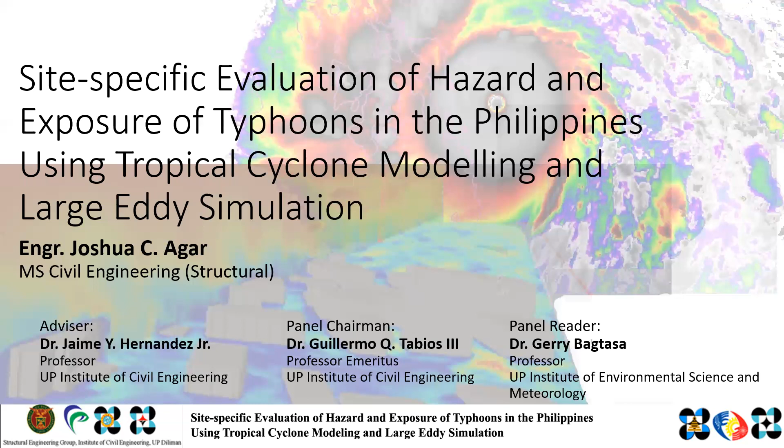I am Joshua C. Agar, an MS Civil Engineering student from the Institute of Civil Engineering with a graduate research entitled Site-Specific Evaluation of Hazard and Exposure of Typhoons in the Philippines using Tropical Cyclone Modeling and Large Eddy Simulation, with Dr. Jaime Hernandez as my thesis advisor. The outline of my presentation will involve the background, the objectives, the definitions of the parameters involved, the methodology, the summary, conclusions, and recommendations.

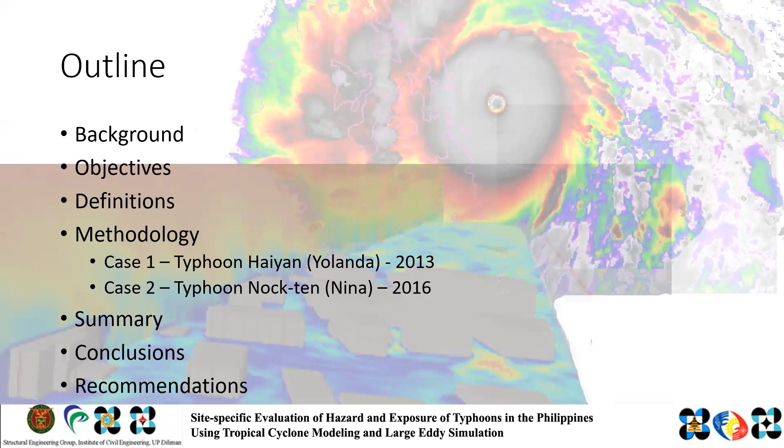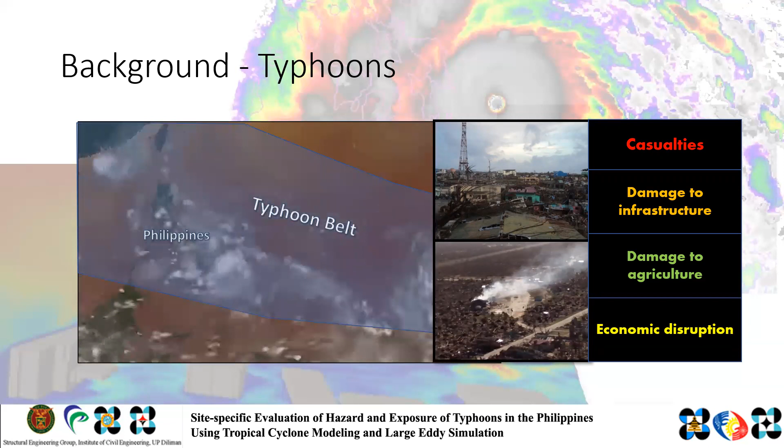The study centers upon typhoons, which frequent the Philippines, an archipelagic nation situated along the typhoon belt, which in turn is exposed to the hazards that typhoons bring, particularly severe winds, on which this thesis is focused. Severe winds amount to risks such as casualties, damage to infrastructure, damage to agriculture, and disruption of the economy. To address the said risk on the engineering side, engineers implement sturdier designs against winds, which are detailed in the wind code provisions of the National Structural Code of the Philippines, currently at its 2015 edition.

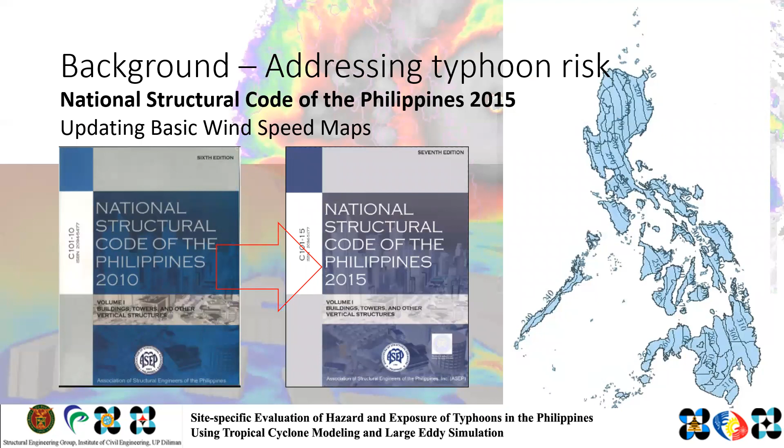One of its major updates compared to the 2010 edition was the updated basic wind speed map, shown on the right. According to the description of the current basic wind speed map, the wind speeds were derived from the generalized extreme value analysis of the wind speeds recorded across synoptic stations of PAGASA all over the Philippines, with a 3% probability of exceedance in 50 years.

Also, using GEV analysis on the station data alone is only applicable for winds of non-cyclonic nature. For example, only the stations in Malaybalay, Butuan, Davao, and Cagayan de Oro exhibit those kinds of winds. I come from Malaybalay, Joshua. Yes po. Okay.

The basis of the wind speed maps, along with the rest of the updated code provisions, were carried over from the ASCE wind code provisions, which center on the wind pressures rather than the winds themselves. In comparison, in other wind codes in countries such as Australia and Japan, the local winds were first determined before evaluating the wind pressures themselves, taking more into consideration what's called wind exposure.

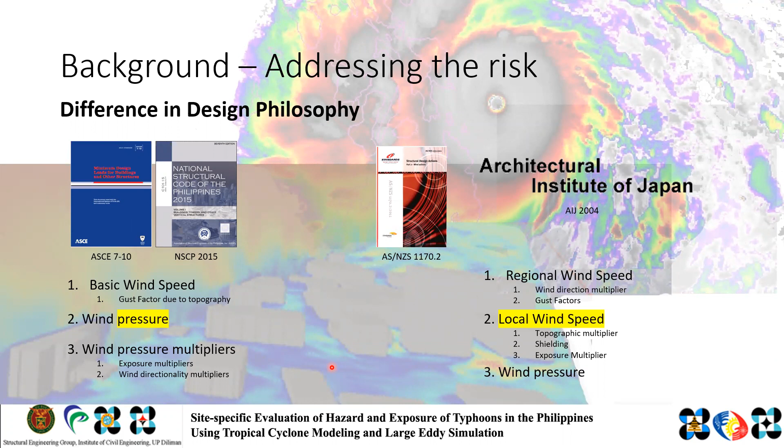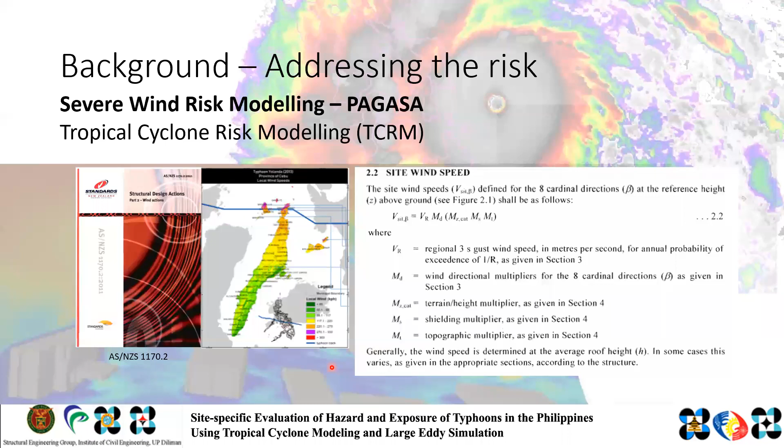With the methodology adopted from their Australian counterparts, PAGASA in its severe wind hazard and risk program aims to evaluate the cyclonic winds through a regional wind probability analysis, while also adapting the parameters for wind exposure from the Australian wind code, which does not translate to the wind exposure here in the Philippines. The typhoon simulation which PAGASA is doing, on the other hand, comes a long way, starting with the determination of the pressure field, which can be translated into the gradient wind by balancing the pressure gradient, Coriolis force, and centrifugal force.

The translation of the storm shown in 5 is now also being considered, so there's an additional component here in determining the gradient wind. However, even so, as Holland found out, the gradient wind does not equate entirely into the surface wind. Attempts have been made by researchers such as Georgiou in 1983 and Fuiji and Mitsuta in 1986 to convert the gradient wind into the surface wind.

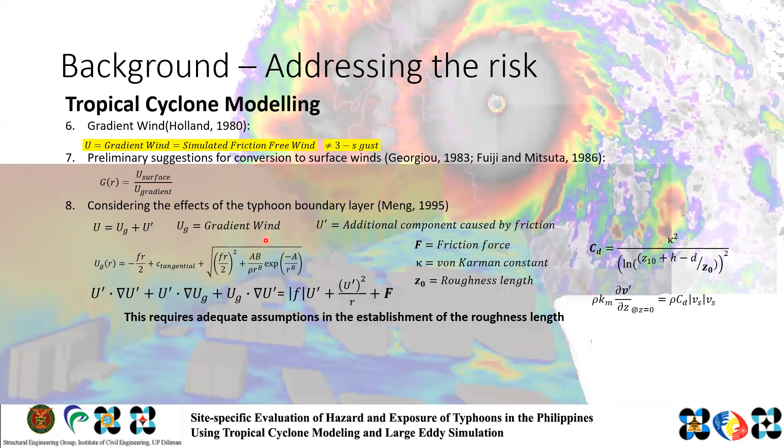The assumptions of the boundary layer no longer apply for complex terrain and urban settings. To circumvent the conventions regarding how a wind flows over a domain, a hybrid model was introduced where the magnitude of the friction-free surface wind was determined using the gradient wind equation, while its dissipation over the complex terrain was simulated using computational fluid dynamics, yielding results even closer to the field measurements.

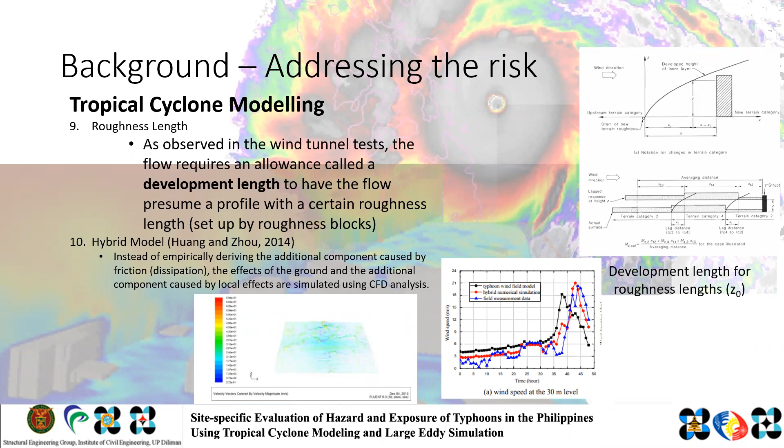What complicates every CFD analysis, however, is modeling turbulence. There are two turbulence models at hand. First is the Reynolds-averaged Navier-Stokes equation, or RANS, which treats the turbulent effects as additional average effects, and large eddy simulation, which treats turbulent flow as a superimposition of eddies of different sizes. So the comparison is shown on the top left. At top right is a flow simulation using RANS. On the bottom right is the flow simulation using LES.

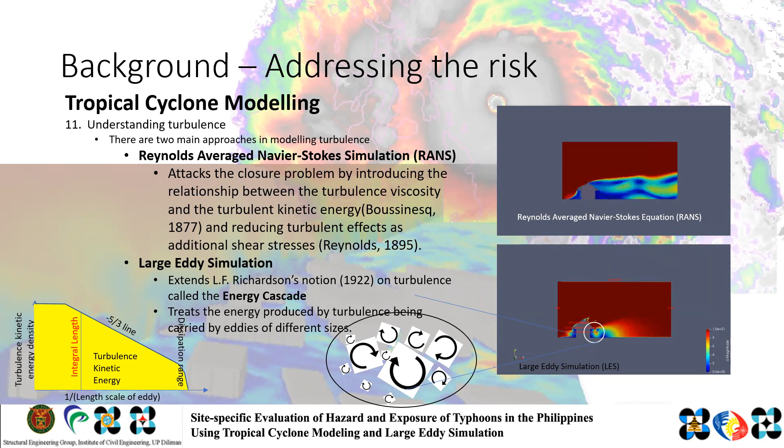The large eddy simulation originated from the energy cascade theory proposed by Richardson in 1922. This means higher turbulent kinetic energy will mean a higher range of eddies whose superimposition could lead to higher peak gusts. The previous hybrid model, the one done by Huang and Zhou in 2014, uses RANS in modeling turbulence, which only accounts for the average effects. Of course, the study focused more on evaluating the wind pressures. This study, however, proposes using the hybrid model with large eddy simulation instead.

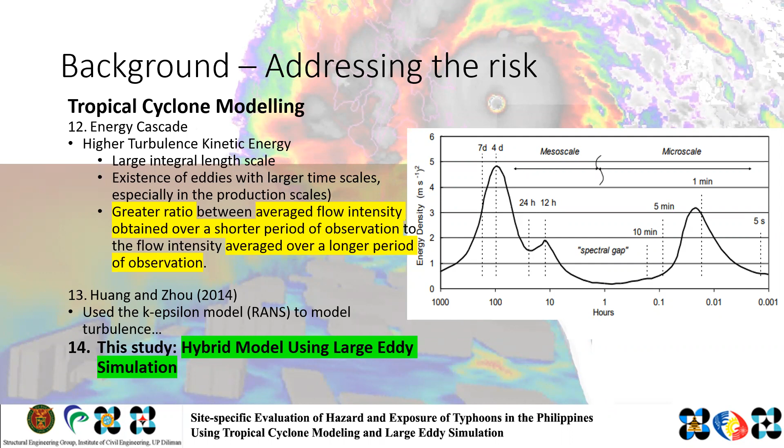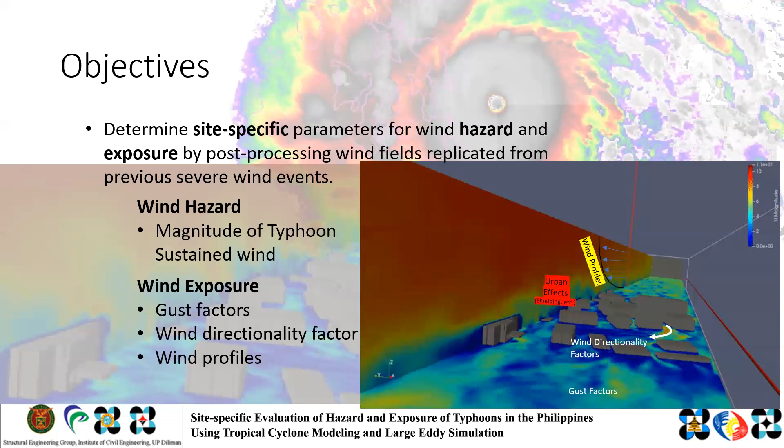So for this study, the objectives were to determine the site-specific parameters for wind hazard and exposure by post-processing the wind fields replicated from previous severe wind events. For the wind hazard, there's the magnitude of typhoon sustained wind. For the wind exposure, this includes gust factors, wind directionality factors, and wind profile. To define each one, we start with the gust factors. These are conversion factors used to determine the 3-second gust from the sustained wind given a degree of wind exposure. For types of exposure, for example, inland, off land, off sea, and at sea, there is a set of gust factors to be implemented. These were the guidelines from the World Meteorological Organization compiled by Harper, Kepert, and Ginger in 2010.

The wind directionality, on the other hand, in contrast to the NSCP definitions, determines which direction the location was most exposed to the severe wind. So, for example, if the location experiences higher winds coming from the northeast, then you assign a higher wind directionality factor or wind direction factor at that sector. The roughness length determines the horizontal mean profile near the ground. The horizontal mean profile was assumed to be logarithmic in nature, and it's mainly controlled by the roughness length.

So we proceed now with the discussion of the methodology. The methodology relies on the weather stations and the typhoon track. These are the data coming from the weather stations, and this is the data coming from the storm track in order to determine the pressure field of the typhoon. So it eventually converges and leads to the pressure field modeling.

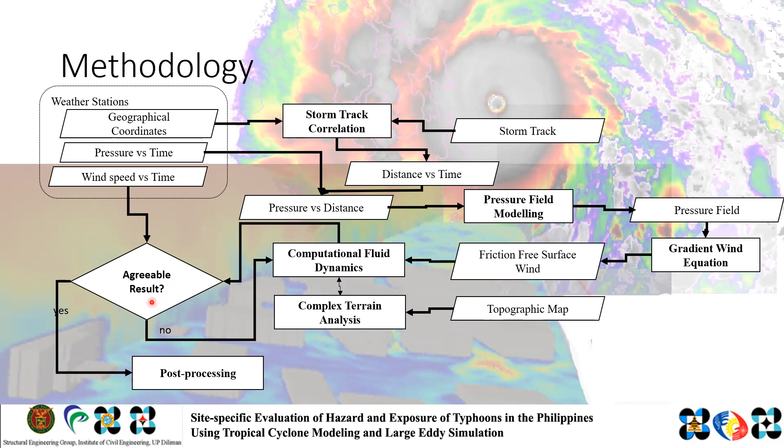Using the pressure field, the typhoon wind field is then simulated, which is then used as the input. So this is the result of the typhoon wind field modeling. This will be used as an input to the analysis involving computational fluid dynamics, which also involves a complex terrain. So once the simulated winds were validated with respect to the actual data, the site-specific factors for exposure can now be post-processed.

The methodology includes modeling the pressure field from the weather stations observing the passage of the typhoon. The time history of the pressure data was then related to the proximity of the storm in order to determine the pressure versus distance graph. The pressure points were then fitted into a rectangular hyperbolic profile proposed by Schloemer in 1957. However, the main difference is that the pressure isobars, instead of being considered as concentric circles, will be considered as ellipses. So the radii of curvature will also be determined in this procedure.

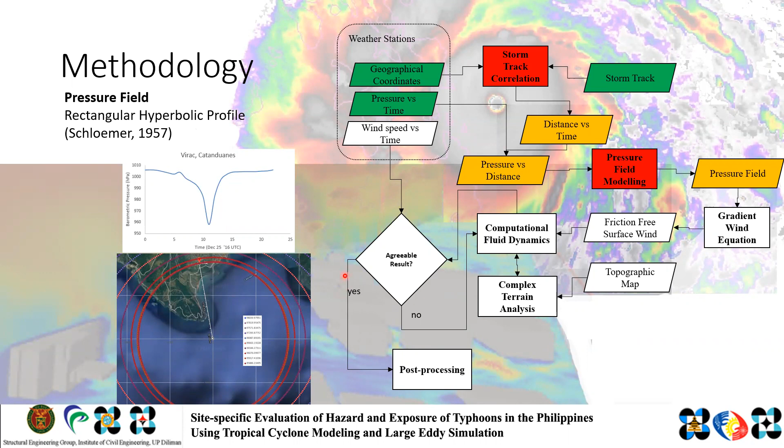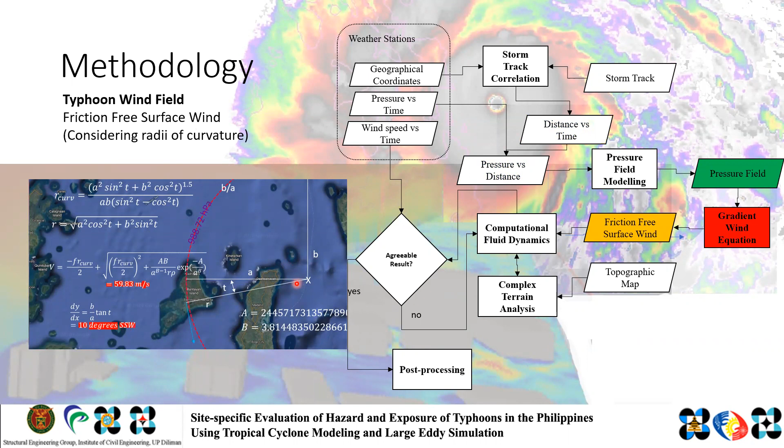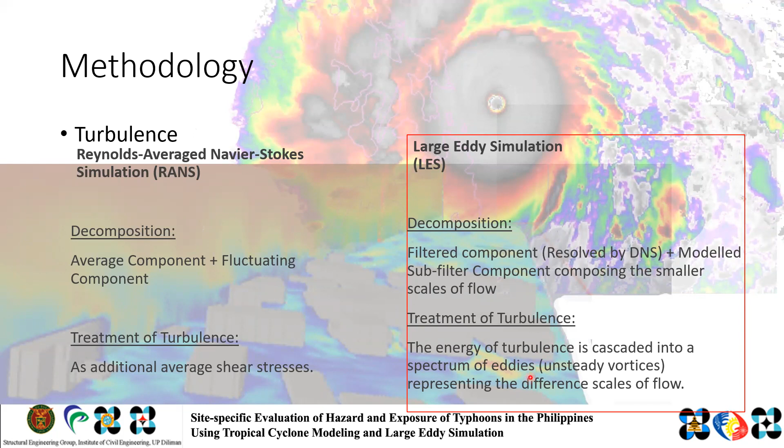Using the radii of curvature, the pressure gradient, the Coriolis force, and the centrifugal force, the typhoon wind field will then be determined, which will be used as the input in the CFD analysis as mentioned earlier. For the CFD analysis, instead of RANS, we will be using LES, which treats turbulence as a superimposition of eddies of different sizes. A complex terrain is generated using the elevation data from OpenStreetMap. To reduce the computational load, the buildings are reduced to mostly rectangular blocks, but still carrying the key dimensions such as length, width, and height.

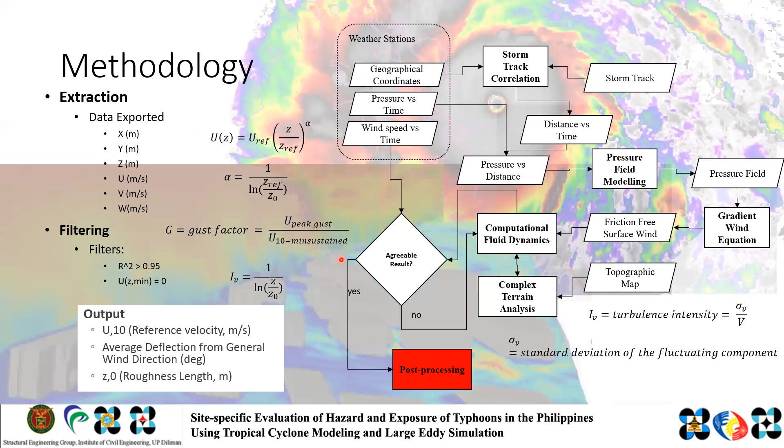Gust factors, on the other hand, are determined by comparing the magnitude of the friction-free surface wind to the local winds. You divide the magnitude of the local winds by the magnitude of the friction-free surface wind. Then you evaluate the gust factors. And finally, we also evaluate the directional deviations of the local winds. And to add to that, we also determine turbulence intensities.

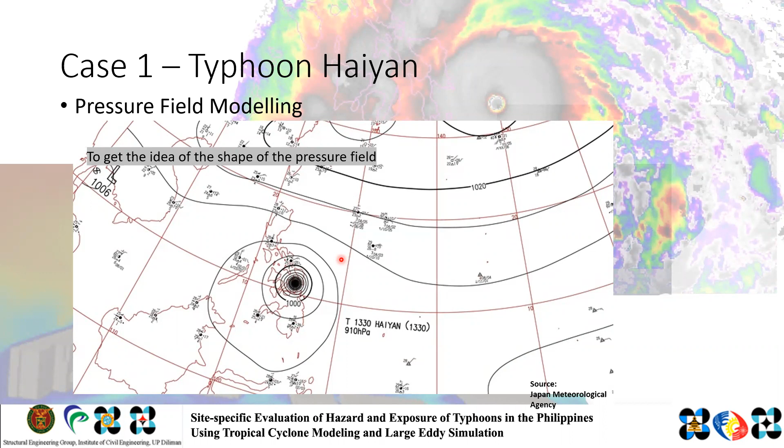The methodology was implemented on 2 cases. The first one is Typhoon Haiyan in 2013. To determine the shape of the pressure isobars, the surface weather maps from the Japan Meteorological Agency were used. So this was their pressure map determined at 8 a.m., after Leyte landfall. The pressure isobars were then fine-tuned using pressure readings from the automated weather stations of the Advanced Science and Technology Institute, or ASTI, highlighted in blue, these 3, as the synoptic stations of PAGASA, particularly in Tacloban and Guiuan, highlighted in yellow markers, suffered extensive damage during the passage of Typhoon Haiyan.

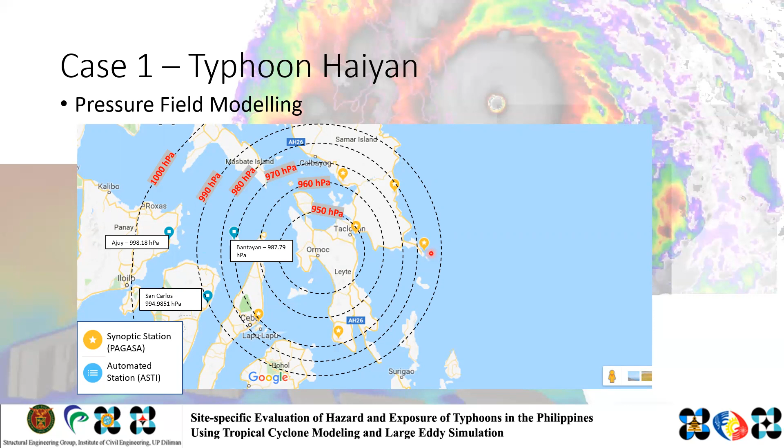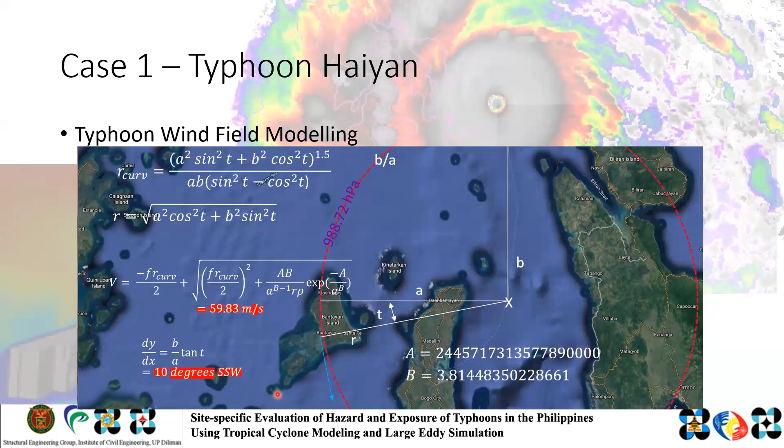Knowing the pressure field and the shape of the ellipses, the friction-free surface wind was determined using the gradient wind equation. So this is the whole equation that I used in determining the gradient wind. In this case, it was 59.83 meters per second, coming from the direction of 10 degrees south-southwest. 59.83 meters per second then becomes the inlet velocity for the CFD analysis. The simulated winds were then related to the actual reading of the automated weather station of ASTI, which is marked as X in the figure, where a peak 2-second gust of 64.1 meters per second was observed.

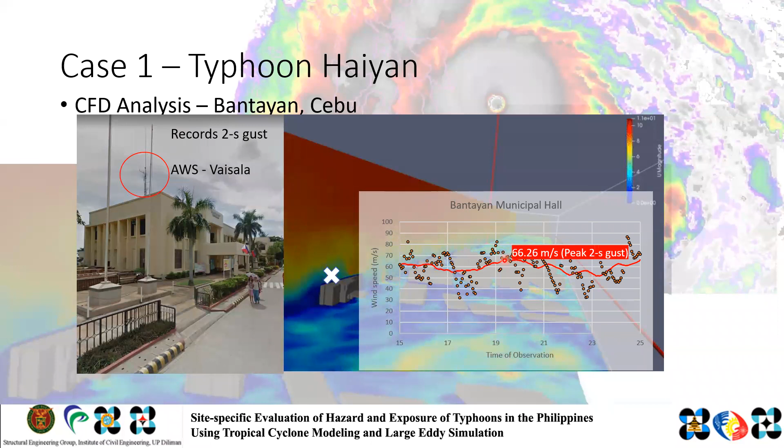The simulated winds were originally instantaneous, so to get the 2-second peak gust, we have to average the winds over a time period of 2 seconds. Getting the 2-second averages yields a peak 2-second gust of 66.26 meters per second, with a difference of 2.16 meters per second from the actual data. Being close enough, the other points in the computational domain were then post-processed. The post-processing involves 5 sections.

4 sections were streets in Bantayan, namely Quezon Street, Rodriguez Street, Osmeña Street, and Ybañez Street. The last section is the central section, bisecting the computational domain, passing through buildings. Among the post-processed data were gust factors, roughness lengths, and directional deviations of the local winds. Also displayed in the subsequent figures that I'll be showing are black lines which indicate the surface elevation. In this section, as with the second case, the treatment of the graph is that the flow always moves from right to left. So we start with Quezon Street and we evaluate the roughness length.

Evaluating the roughness length reveals its relationship with regards to the building density. So in this case, this is the region where higher building density was observed. The higher the building density, the higher the roughness lengths observed, ranging from 0.1 to 3.5. When there's lower building density, you would observe lower roughness lengths.

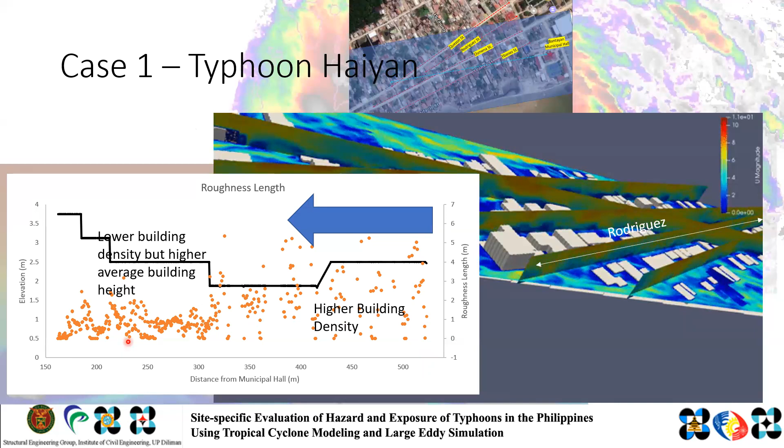The same behavior of roughness length can be observed in Rodriguez Street, with the roughness length being higher at regions of higher building density, now ranging up to 5 meters compared to the peak of 3.5 meters at Quezon Street. So same behavior: lower building density, lower roughness length.

For the most exposed street, Ybañez Street, when compared to the other streets, the street exhibited more erratic directional deviations. So the local winds veered left and right along the street. You can see, for example, this is 0, the wind veers from left and veers from right, and so on and so forth.

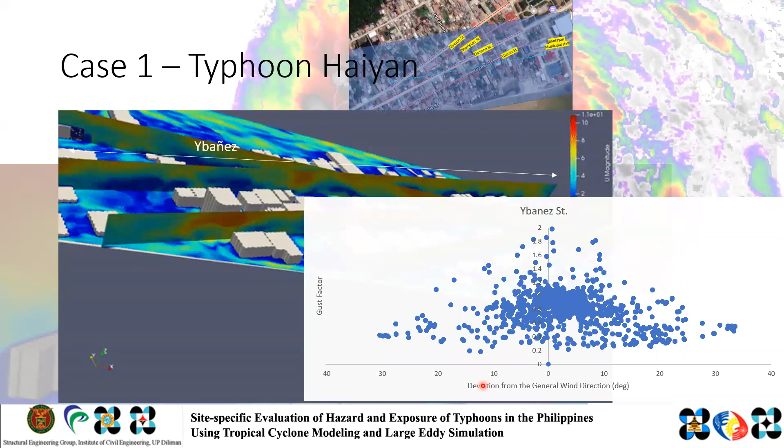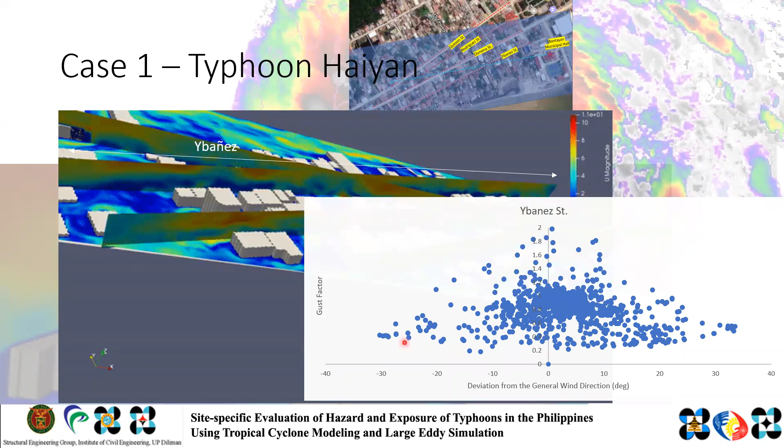Plotting the directional deviation with respect to the gust factors reflected the fact that as local winds became aligned to the direction of the general wind, the more likely they are to build up momentum, resulting in higher peak gusts. So if the local winds deviate more from the general wind direction, you would expect lower peak gusts to be observed.

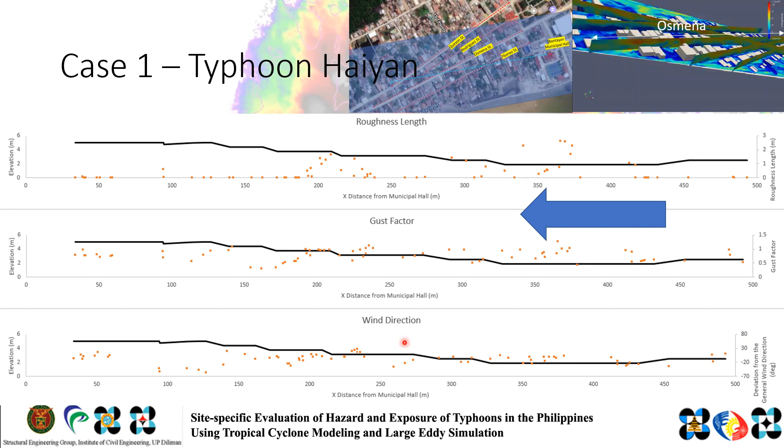On the other hand, on Osmeña Street, out of the 15,700 points post-processed, only 500 points made it past the filtering process. This indicates that most of the wind flow moving through the street lost its logarithmic profile. This has to do with the assumption in the boundary layer profile where only the ground is bringing shear stresses to the flow.

In cases such as Osmeña Street, where most of the mid-rise buildings are situated, the shear stresses also originate from the buildings themselves, causing a disruption of the vertical wind profile. This also caused downdrafts, which damaged the already deteriorating Escario house at the end of Osmeña Street. The Escario house is marked as X in the figure.

Finally, the central section will cover how the exposure parameter changes when there are buildings involved. So we highlight this section. It reveals how, as the wind flow changes elevation, for example from sea level to a certain elevation after encountering the beach, initial amplification occurs where the wind picks up momentum. Then naturally, the wind flow separates, causing a decrease in the gust factor.

So this, for example, is the beach. Then you observe an initial amplification. Then as flow separates, you observe a decrease in the gust factors. Then as the wind flow reattaches to the ground, momentum picks up again, resulting in higher peak gusts, shown here.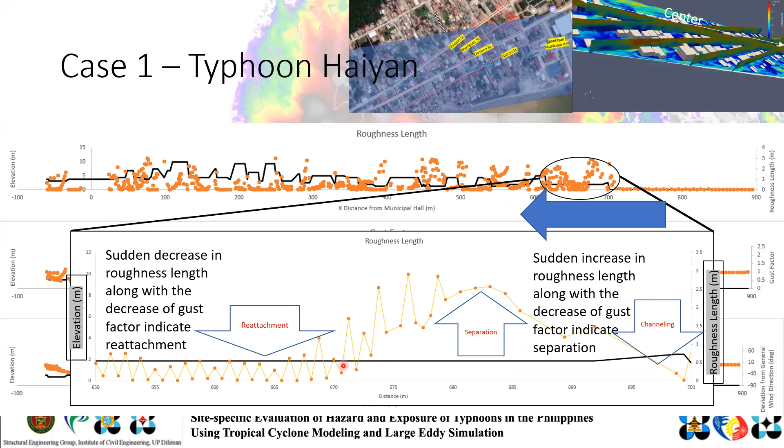On the other hand, as wind flow changes over the changing ground elevation, the roughness length decreases. Once it encounters the beach, there's a sudden change in elevation and flow channeling is observed. We observe that the roughness length decreases up to 0.01 meters. Then as wind flow reattaches, the roughness length follows a normal value of around 0.5 meters to 1 meter.

The same behavior of the roughness length was also observed in instances where the wind flow encounters a building, with the flow separation causing an increase in roughness length up to 1.5 meters and the reattachment and contraction causing a decrease in the roughness length up to 0.01 meters.

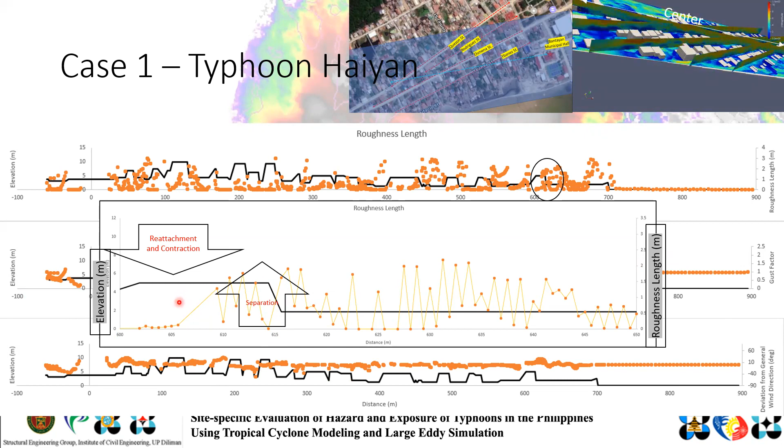Turbulence intensity can be computed from the simulation. The turbulence intensity is computed by evaluating the standard deviation of the fluctuating flow divided by the mean wind speed; then you get your turbulence intensity.

On the other hand, there's also a prescribed value for the turbulence intensity, which can be determined as proposed by previous researchers using the roughness lengths. So we compare that to the empirical values, which are determined from the roughness length values alone. This along y is the turbulence intensity computed using this equation.

This assumption came from a study involving boundary layer flows at higher latitudes. So with the Philippines being on lower latitudes, of course, this no longer applies. And also in a complex terrain where the ground is not the only one causing shear stresses to the flow, this no longer applies. So basically, naturally, these two will no longer be equivalent. So this reveals differences since we are now dealing with complex terrains.

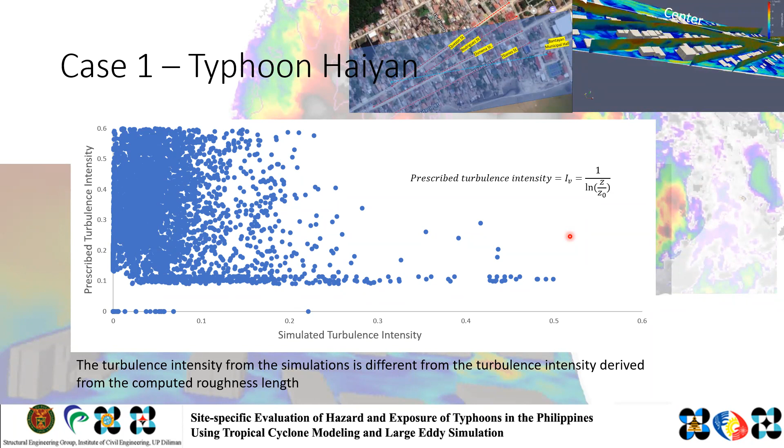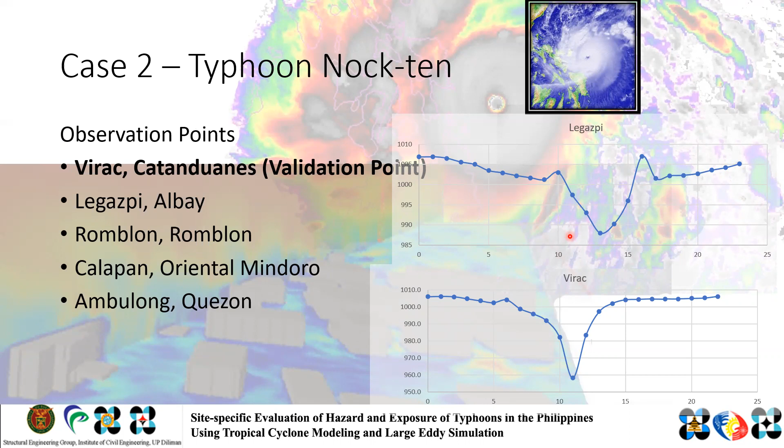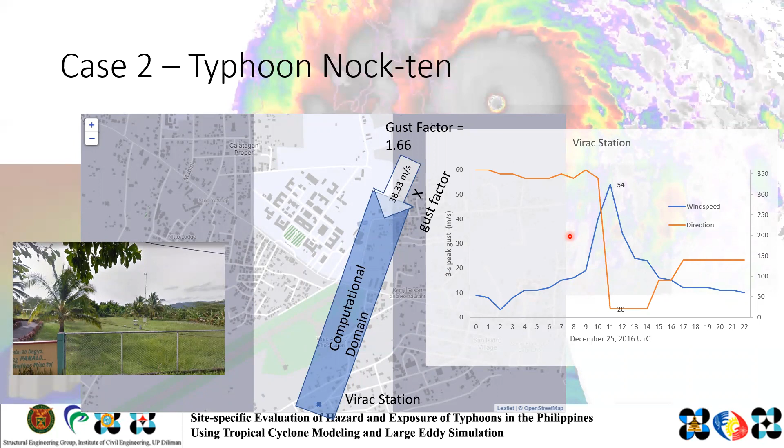Now shift to the second case, which was Typhoon Nina in 2016. The study uses the following weather stations as observation points, so these 5 with Virac station as the validation point. So the pressure field modeling and the subsequent typhoon field modeling returns a value of the friction-free surface wind to be around 38.33 meters per second. However, the winds were coming from the northeast, meaning inland. To take into account the change of exposure in the inlet boundary conditions, the friction-free surface wind has to be multiplied by a gust factor, which in this case was 1.66.

The simulated peak gust was determined to be 57.83 meters per second over here, and it has an average value of 54.7 meters per second. This in comparison to the actual recording of the station to be about 54 meters per second.

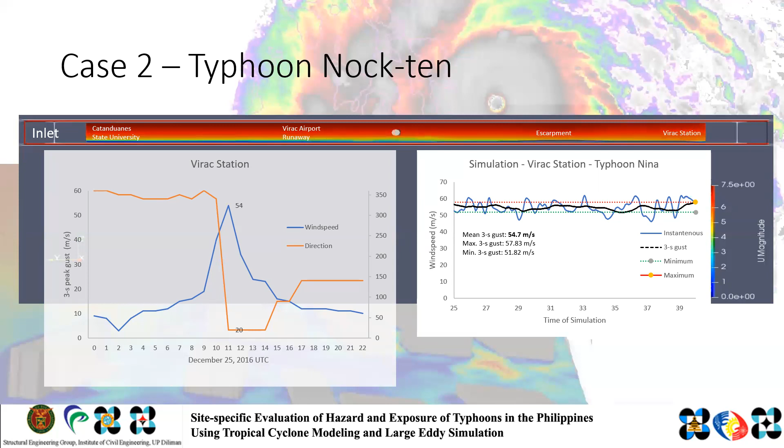Okay. The wind flow, initially in the computational domain, passes through the vicinity of the Catanduanes State University, then it passes through the Virac Airport, then it encounters a slight escarpment as shown in the elevation profile here, before reaching the weather station itself. Plotting the gust factors with respect to the ground elevation shows a positive relationship between the change of peak gust to the change in elevation, starting at 1.36, then hitting 1.64 at the escarpment, then decreasing to as low as 1.43 as the flow descends by the time it reaches the station.

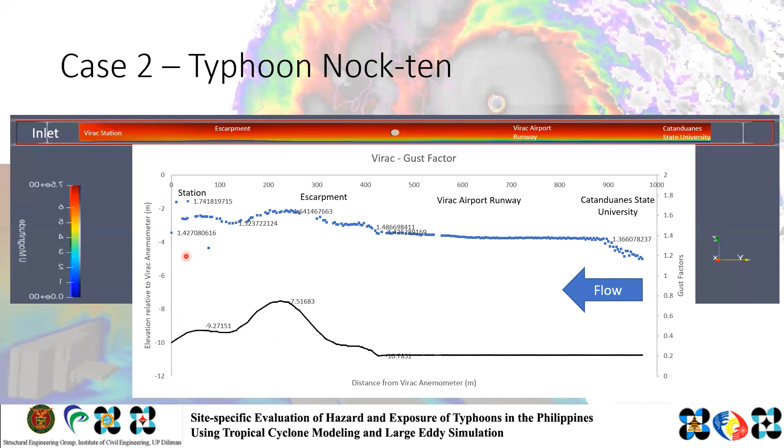Sorry. Wait a minute.

Plotting the roughness length, on the other hand, reveals the same behavior on how the roughness length changes over the change of terrain. From a more inland terrain, the roughness length transitions into a much steadier value as it was given length and ample space to develop. So from around 0.7, it develops into a 0.3 roughness length. Then as it encountered the much flatter runway, it then transitions into a new roughness length. So the flow begins to descend.

But before it reaches a constant value, the wind encountered the escarpment. So as previously mentioned, when there's a positive change in elevation, there's a negative change in the roughness length, causing a decrease in the roughness length. So the roughness length decreased from around 0.18 meters to 0.06 meters.

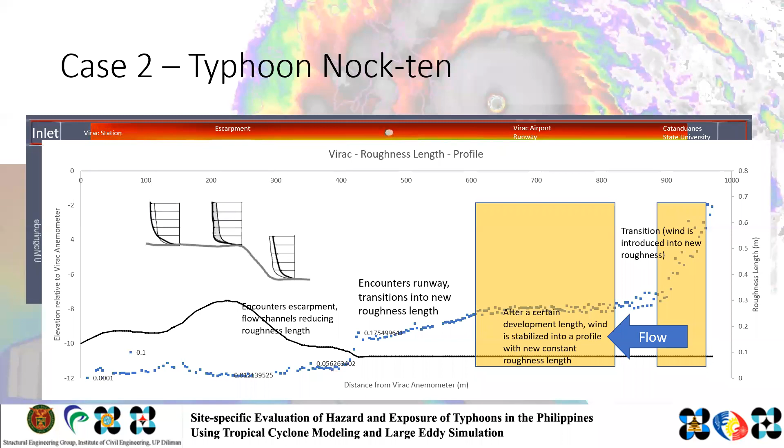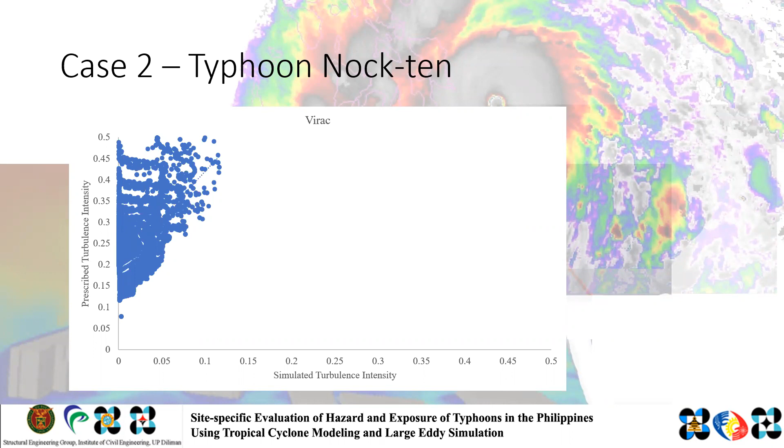Evaluating the simulated turbulence intensity and the turbulence intensity derived from the roughness length, as previously done in the case of Typhoon Haiyan, shows that at low latitudes such as the Philippines, the previous assumptions no longer apply, though we can observe that there's still a positive relationship between the prescribed and the simulated values.

So in summary, in the typhoon wind field modeling, Typhoon Haiyan at 8:30 a.m. was determined to have a minimum central pressure of 923 hectopascals. The recorded peak gust at this time was 64.1 meters per second, and simulation returned 66.26 meters per second. On the other hand, for Typhoon Nina, the minimum central pressure was determined to be 948.88 hectopascals. The recorded peak gust by the station was 54 meters per second, and the simulated peak gust was 57.83 meters per second.

So we now lead to the conclusion. We conclude that the increase of gustiness shows a positive relationship with the increase of elevation with respect to the general wind direction. So if there's a change in elevation, we can expect that there's a positive change in the gust factor.

So there will be an increase in the gustiness. This works on both cases, so the cases on Bantayan and the cases on Virac, same was observed. The change in gust factors and roughness length are also indicative of the flow separation, channeling, and reattachment.

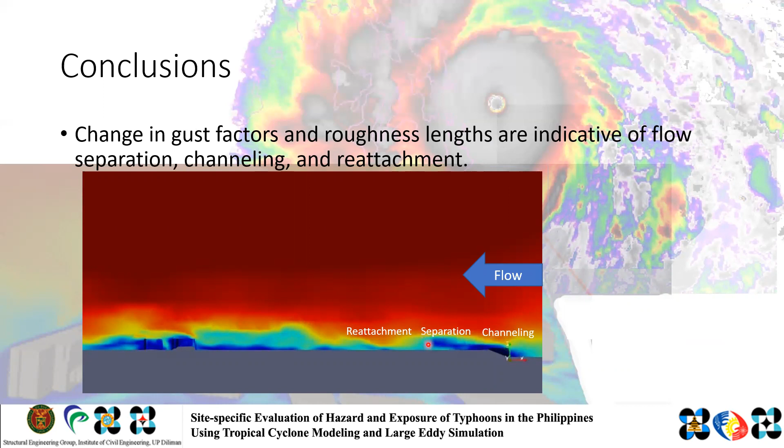So this is the sample plot for encountering the building. And for example, in the beach, this is what happens. This is the visualization of the flow upon encountering the beach. So this is the beach. There's a change in elevation. There's channeling. Then there's flow separation. Then there's flow reattachment.

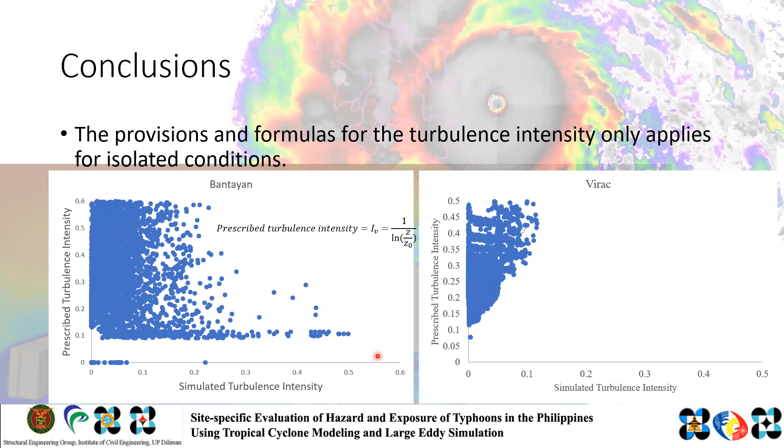The provisions and formulas for turbulence intensity are found out to only apply for isolated conditions. So if it involves an urban setting or complex terrain, the prescribed values for the turbulence intensity no longer apply. The boundary layer also diminishes in areas with mid-rise structures, as the assumptions of the boundary layer no longer apply with the additional shear regions.

With this given methodology, we can now perform citywide evaluation of wind exposure to project the local wind effects. We transition from an area-based approach, where we treat a certain area with a constant roughness length, project the local winds, and treat that the area experiences the same winds. So that was the previous approach, the area-based approach. We can now transition to a feature-based approach, so site-specific evaluation of the magnitude of the winds and the exposure parameters.

Quantifying the wind exposure for complex terrain can be mostly divided into two: the effects of the ground elevation, so if there's a change in ground elevation, we can observe an increase or decrease depending on how the ground elevation changes, and the wind interference among building wind envelopes.

My recommendations, as I encountered shortcomings in performing this research: one is to develop an asymmetrical 2D model for the pressure field. So even though I began to consider ellipses, there's still symmetry in the pressure field model that I derived. Then further post-processing the data, the exposure parameters from the complex terrain analysis, so we can derive empirical formulas to predict the wind exposure for cases such as complex terrain.

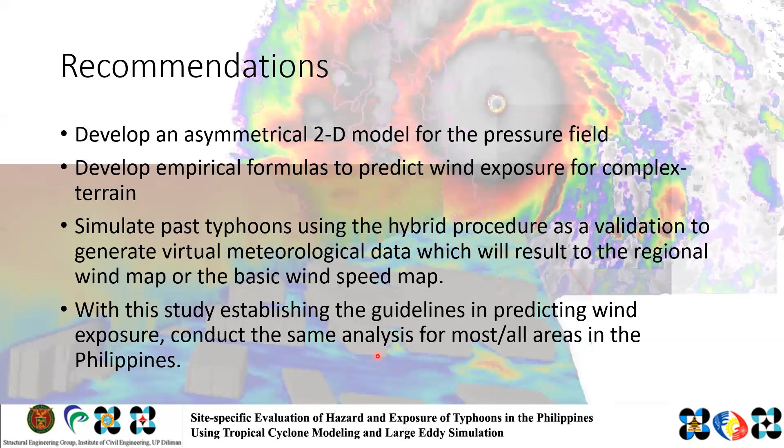Then we can proceed with the simulation of past typhoons, using the hybrid procedure as the validation, in order to generate virtual meteorological data, which will result in the regional wind speed map or basic wind speed map. With this study establishing the guidelines in predicting wind exposure, it is recommendable to conduct the same analysis for most or all areas in the Philippines. These are the references that I used in this research. And with that, I close my presentation, and I'll now be entertaining questions from our audience and our panel.

Thank you very much. Thank you, Joshua, for the presentation. Quite a nice one to see. So maybe anyone from the panel can ask first if you have anything. Well, to get the ball rolling, I'm the advisor, so I've asked a lot of questions already. I would like to ask something he did not include in the presentation, and I think it's important information for us to know as well.

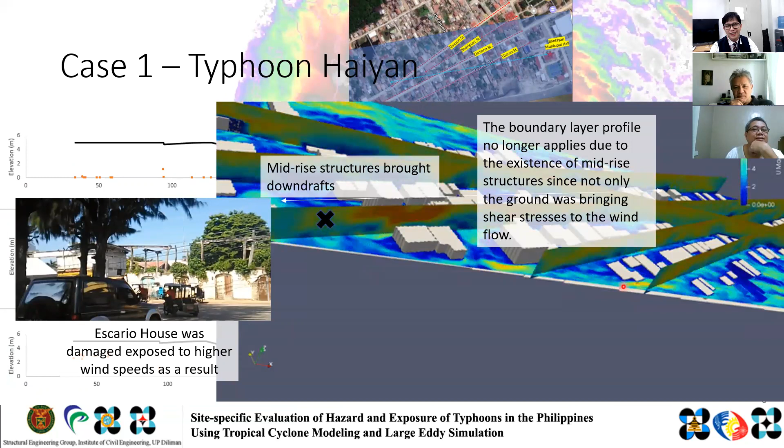How long were the computer runs in simulating this city-wide CFD? For the case of Typhoon Haiyan, let me roll back the slides a little bit. Overall, it took me over a month to simulate. On the other hand, for the kilometer-long computational domain of Typhoon Nina, it took me 2 months to simulate.

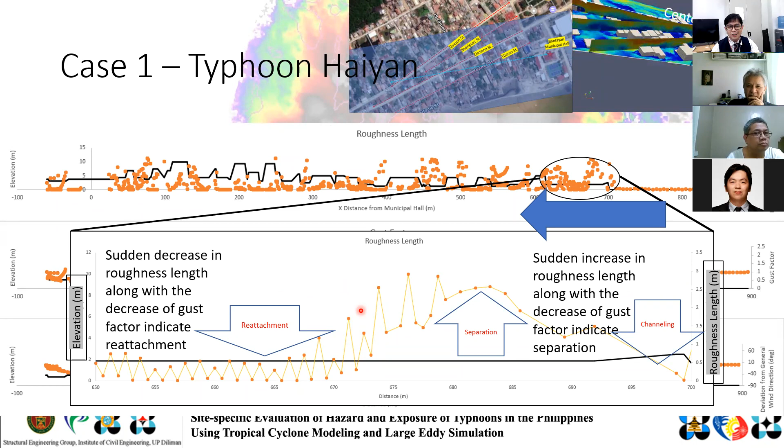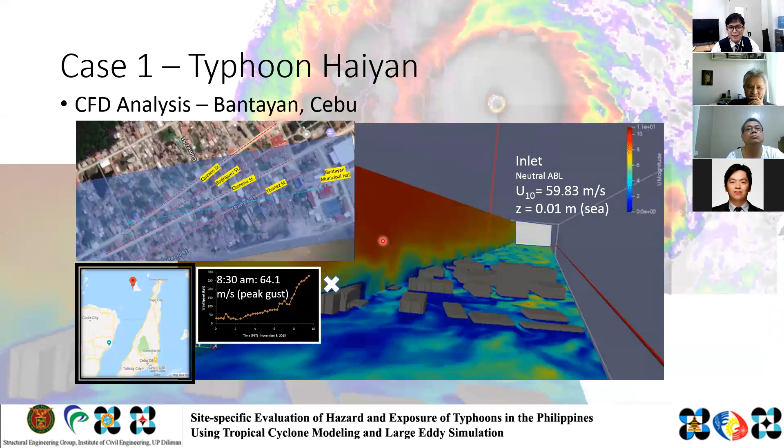Okay. To answer your question, sir, I would roll back a few slides. Wait a minute. So it's been many slides. So here, sir.

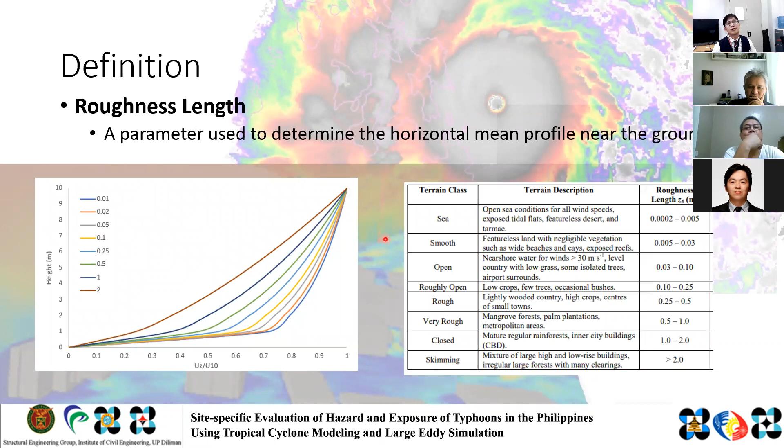So here are the compiled values. Some researchers have already found out that the roughness length has some dynamic nature. So in order to eliminate the complications, they try to establish what's called terrain exposure. They divide it into categories. Then in these categories, we lump that, for example, in sea conditions, these are the roughness lengths that you use, and so on and so forth. This came from the assumption that they allow the flow to develop over some distance so that they can be determined.

However, in cases, for example, at this point here, the flow constantly undergoes transition. So it doesn't settle on a single roughness length. Because in water, in a channel, when we have flow through vegetation, we can account for the porosity of the vegetation, the vertical scale, but we can also look at the height of the water. So the Manning's coefficient, for example, may be modified according to the depth of the water, which is basically what you're trying to do here. Instead, it will be the buildings as well as the physical topographic features.

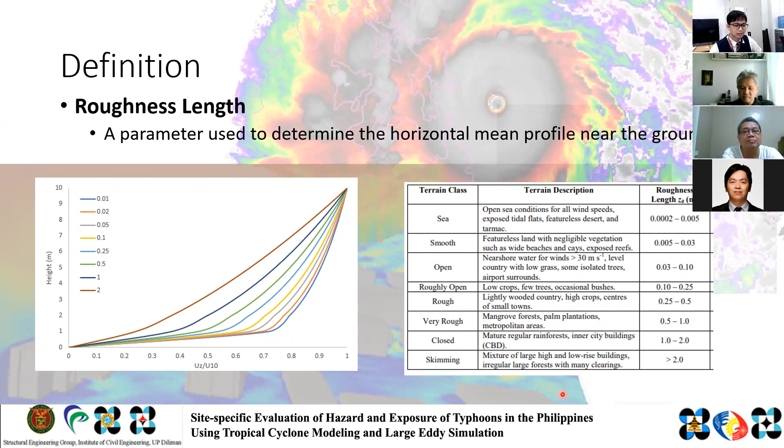Dun sa, sandali, hanapin ko lang. So dun sa introduction, may history lesson which is interesting. Okay, don't get me wrong. Interesting, pero I feel that many of the historical narratives are irrelevant. So for example, sinabi mo na, di ba, from the time of Magellan, because of the galleon trade, may mga bagyo.

That's very interesting. Pero hindi mo minention yung halimbawa, yung recent statistics ng pagtama ng bagyo sa Pilipinas. Like, di ba, 20 pumapasok sa PAR, and then around 10 nagla-landfall, which are very relevant to your study. So na-mention mo yung from 400 years ago, pero hindi mo na-mention yung last 40 years. Parang I find that a little strange.

Tapos marami kang factual claims. Like si Magellan, di ba, for example, si Magellan naka-encounter ng bagyo, pero walang citation. So I find yung introduction mo lacks citation. And madali lang yan, di ba? Si Selga. Yes. I'm sure nakuha mo yun mostly kay Selga. Yes po. So yun lang, i-cite mo lang siya. Yun.

Also nahirapan akong i-follow yung manuscript kasi unang-una kakaunting sentence lang tapos ginagawa mong bagong paragraph. So like one paragraph consists of 2 sentences. Sometimes worse, 1 sentence lang, 1 paragraph. Parang that's very strange. Napapansin ko yan sa mga estudyante in the last 5 years. I suppose because pag nagpo-post sa Facebook or Twitter, limited ka with the number of characters. Pero dito, you're not limited. Pwede ka mag-paragraph ng maraming sentences. Walang pumipigil sa'yo. And in fact, you should do that.

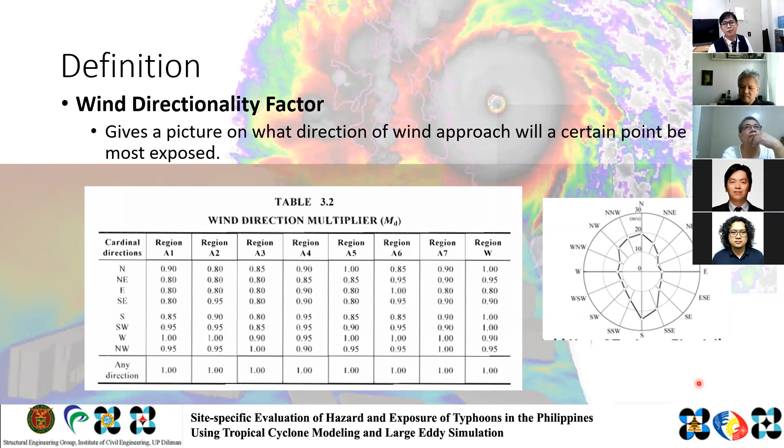If I may add, I actually went to the site. Oh, that's good. To evaluate whether I was modeling it right. However, syempre, I was constrained na lesser edges dapat para less yung computational time, kaya kailangan kwadrado na lang. So what I verified on the site mismo is yung heights talaga ng building and yung top view dimensions.